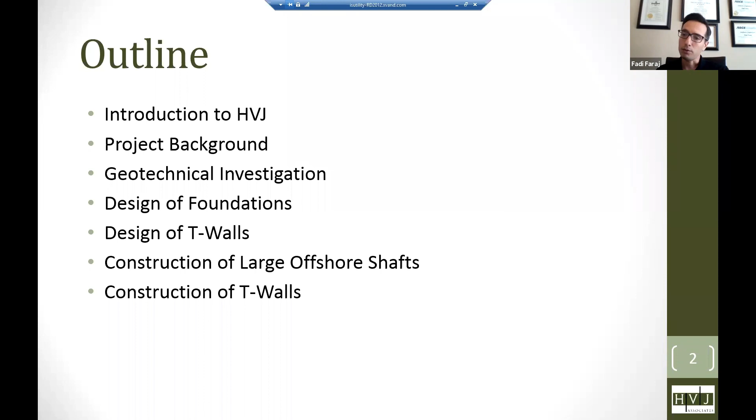Here's the outline of the presentation. We'll start with an introduction to HVJ, then the project background, the geotechnical investigation we did, the design of foundations, design of T-walls, and then the construction of large offshore shafts we used on the project, and also the construction of the T-walls.

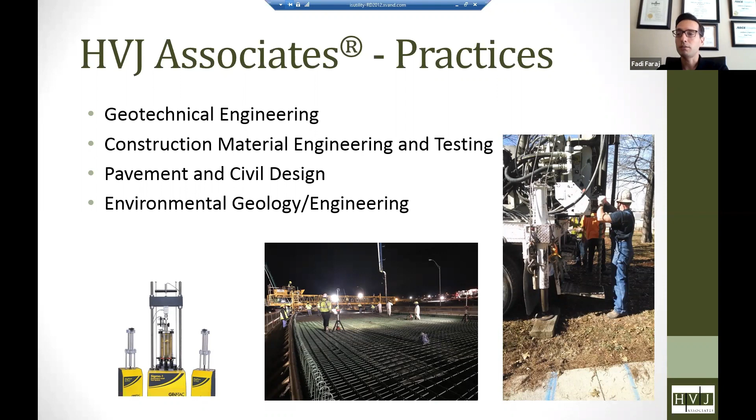At HVJ, we practice geotechnical engineering, construction materials engineering and testing, pavement and civil design, and environmental geology and engineering. Here are some of the markets that HVJ works in: roads, water, wastewater, flood control projects, airports and ports, rail and transit, buildings, and parks.

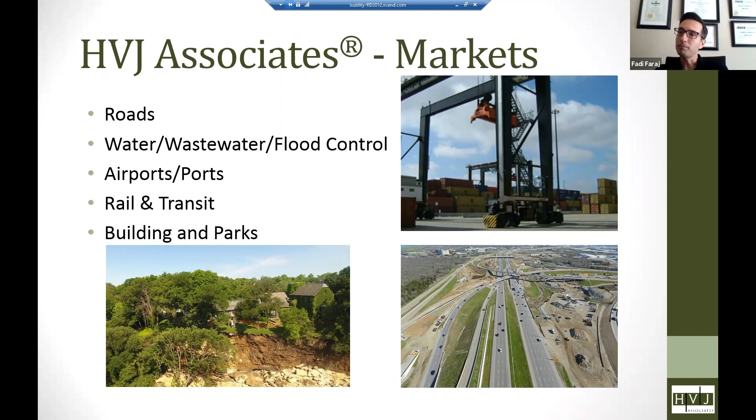A little bit of history about HVJ: it was established in 1985 by Herb Johnson. Then in 2016, it became the first engineering franchise in the United States. We have a Dallas franchise and an Austin franchise, and offices across Texas. Overall, we have more than 150 employees system-wide, and we're always looking to recruit new talent.

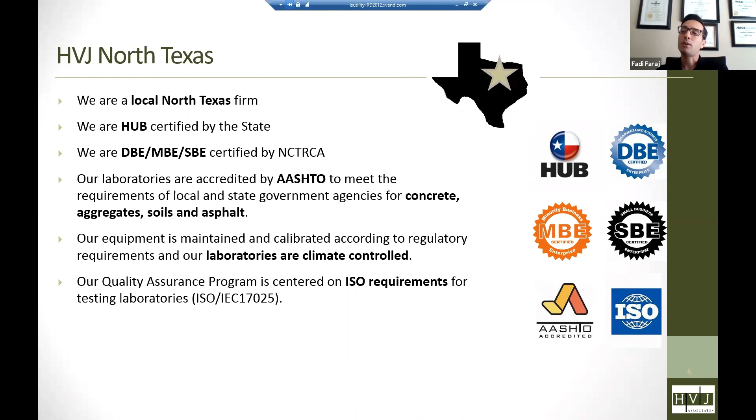I'm with the HVJ North Texas franchise, so we're a local North Texas firm. We're HUB certified by the state, and also DBE, MBE, SBE certified by NCTRCA. Our labs are accredited by AASHTO for concrete, aggregates, soils, and asphalt, and our equipment is maintained in laboratories that are climate controlled. We also follow ISO requirements.

These are some of our clients. We do transportation projects for NTTA and TxDOT. We do mass transit and rail projects for DART and Trinity Metro, which today's topic, the TRE, is operated by DART and Trinity Metro. Also, we do aviation like Dallas Fort Worth and Dallas Love Field. We do water projects like NTMWD, the Upper Trinity Regional Water District, and TRWD. Also educational institutions like UNT, and independent school districts like Dallas ISD. We do city projects for the City of Dallas, Plano, Allen, Frisco, and Richardson, and county projects like Dallas County, Tarrant County, and Hunt County. So most of our work is in the public sector.

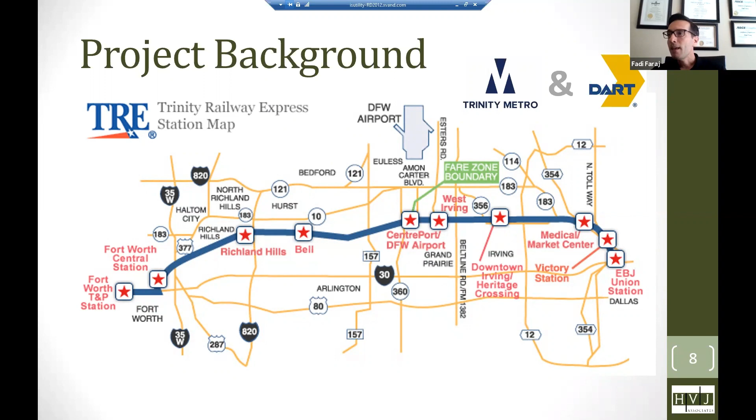So let's talk about the TRE, the Trinity Railway Express project. This commuter rail started on December 30th of 1996 — it's been about 25 years. It goes from downtown, from Union Station, connecting Dallas to Fort Worth, going through Irving and Richland Hills. A fun fact about this commuter rail is that on the first day it started, more than 4,000 people rode this train. It's operated by Trinity Metro and DART.

Our project is on the Fort Worth side. It's shown in this area, close to I-35W.

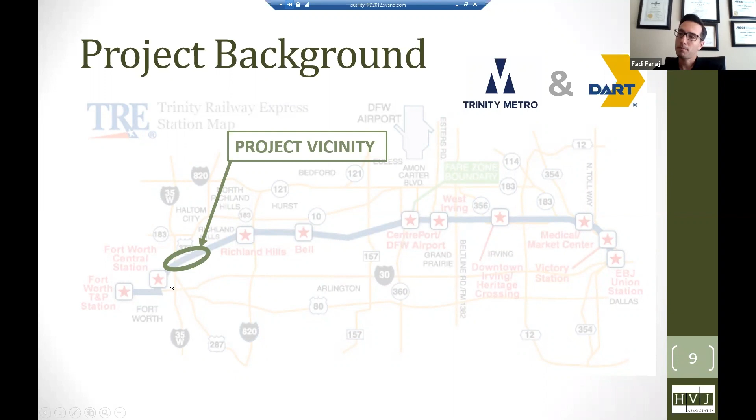So the Trinity Railway Express, when it crosses the Trinity River, this is where the project is. The limits are from I-35W on the west side to Sylvania Avenue on the east side.

It's a single track section, and it crosses the Trinity River over a 764-foot long bridge. This is not only used by the Trinity Railway Express, it's also used by Amtrak, Union Pacific, and BNSF. So it's heavy rail.

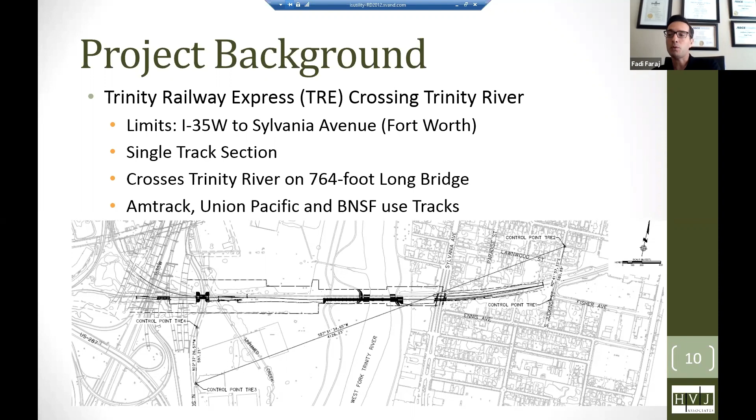So the existing bridge condition - this was constructed in 1903. It's more than 100 years old. It requires frequent inspections and maintenance. The freight trains have to reduce their speed to 10 miles per hour when crossing this bridge, and this causes a lot of delays. They have to wait on the bridge before they proceed to the next junction.

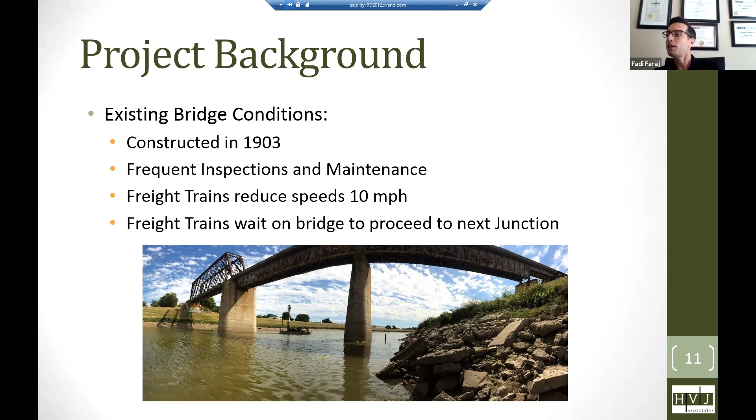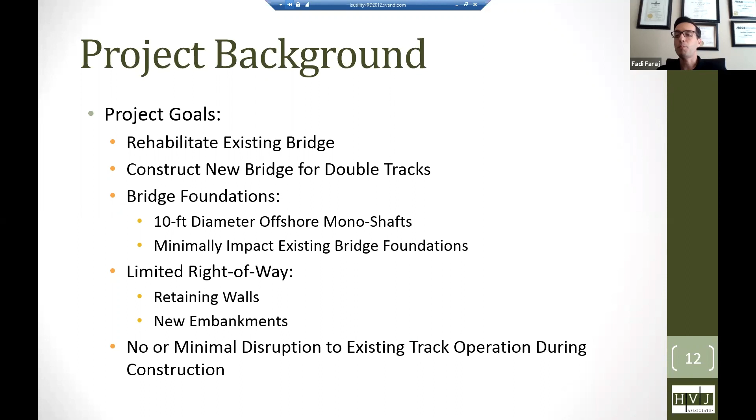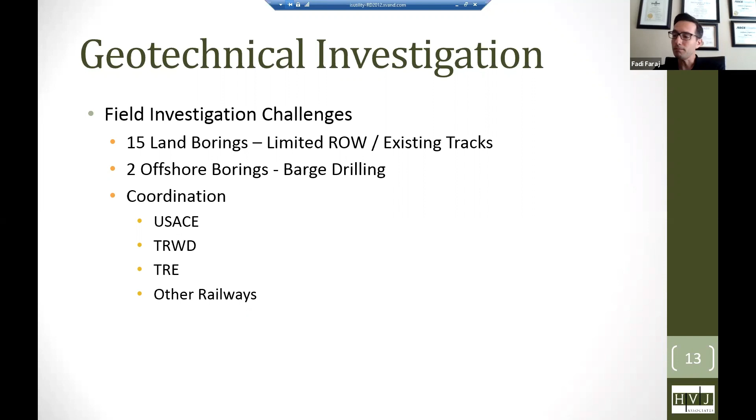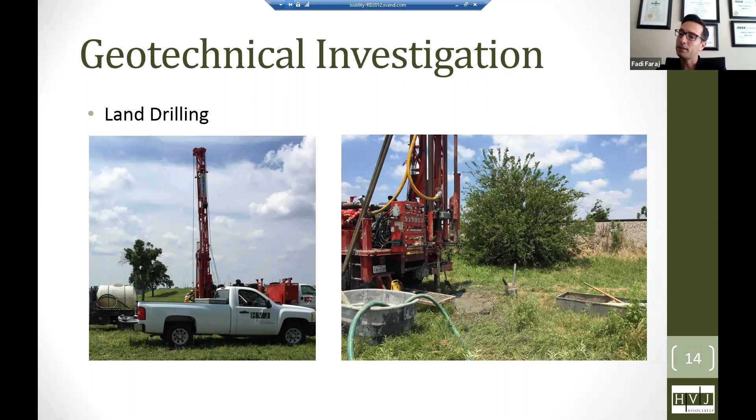Here are some pictures of the land borings we did. So we tried to stay away from the tracks, 25 feet away. There's a criteria - if you're within 25 feet, it requires flagging, and if a train is coming by, you have to stop the operation, and you may need to move the rig away and come back. So that was a little bit challenging.

And we used the barge to drill the offshore borings. So this is the existing bridge, and these are the existing columns. We wanted to put the new bridge right next to it, so we needed to drill 2 borings close to these columns. We actually had to bring a crane to drop the barge in the river because there was no nearby access.

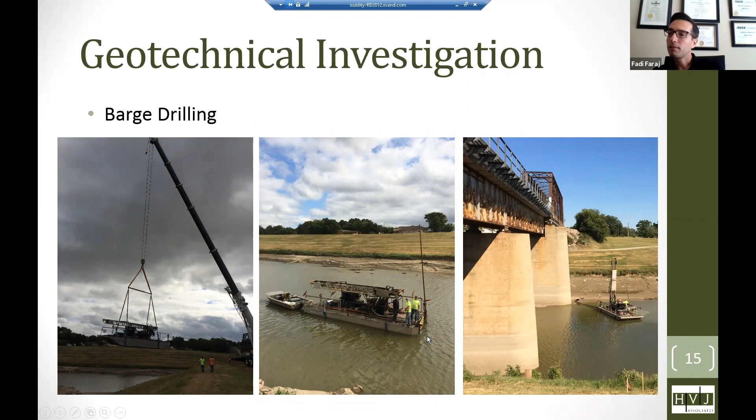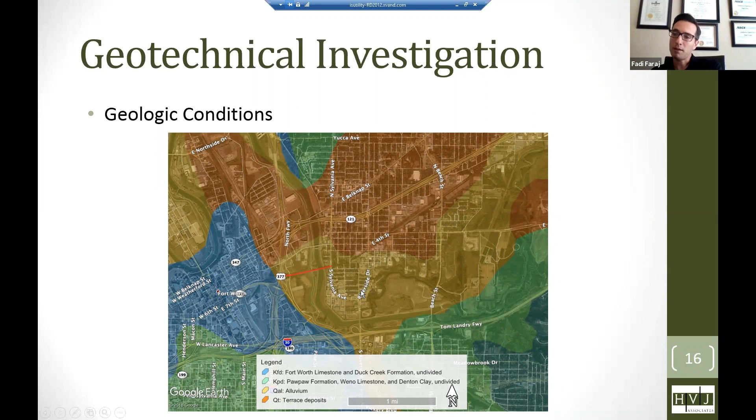And the layers in the DFW area dip from the west to the east direction. So for example, the Pawpaw formation would be on top of the Fort Worth limestone. However, because of the river, we have the alluvium deposits and the terrace deposits.

So the Fort Worth limestone and Duck Creek formation consists mostly of limestone and it has clays in it. The Pawpaw formation, Weno limestone and Denton clay, undivided also, consists of alternating layers of limestone, shale, and clay. Then the alluvium deposits and terrace deposits predominantly consist of a variety of clays, silts, sands, and gravels, and they're typically unconsolidated to semi-consolidated deposits found near rivers.

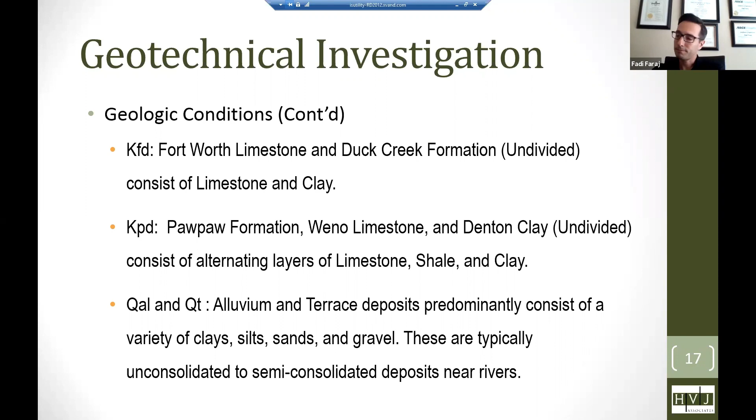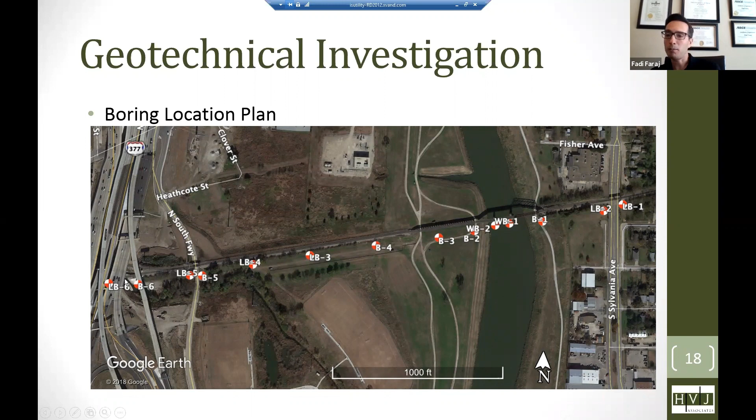So we collected these borings, and these are the tests we've conducted. We did moisture content tests. It's not that costly a test, and it gives you an indication about the soil conditions, if they're wet or dry. If they're wet, for example, they could be soft and consolidate more. If they're dry, they'll be dense and stronger, but they could swell more. So it's a good indication about the soil conditions.

Also we did Atterberg limits. We use this test for classifying the soils, if they're highly expansive clays or lean clays or not. We also did the number 200 sieve, which tells us about the material, if it's sandy or clay or silt. We did sieve analysis also to get an idea about the distribution of the granular material.

So these four tests were mostly for classification. We also did unconfined compression tests, compressive strength on rock, and unit dry weight. These tell us about the strength of the material. We did also direct shear. This test tells us about the long-term strength, which we would need for the global stability of retaining walls. We also did free swell tests and consolidation tests. Those would tell us the potential movement upwards or downwards of the soils.

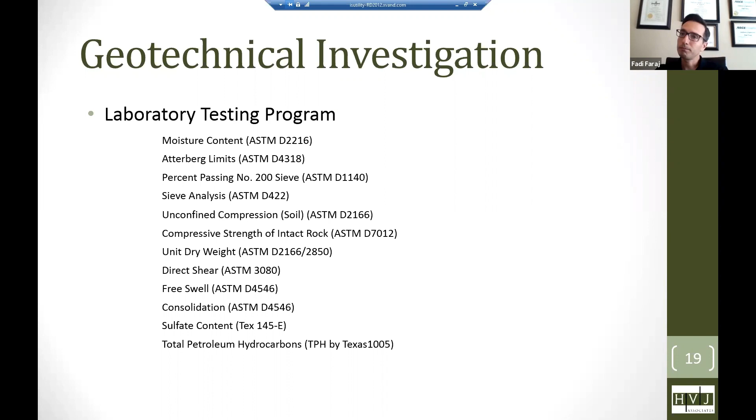This is an example boring log. I picked B5, it's in the middle of the alignment pretty much, just to give you an idea about typically what we've encountered. There was some fill material. There was sandy lean clay at the top, about 6 feet. Then we had fat clays below it with liquid limits above 50. The strength was okay, pretty stiff in this area.

Then we hit the groundwater around 8 feet and it became soft. Then it was followed by lean clay, then sandy lean clay, then clayey sand, and then we had gravels. This is very typical of alluvium and terrace deposits, alternating layers of all kinds of material. And then it was followed by weathered shale, which was followed by limestone, which was followed also by shale. So the geology map shows pretty much what we encountered in our borings.

These are TCPs, the Texas Cone Penetration test. So here we had like 5, this is 11, this is 16. As we started going deeper, the strength went up a little bit, but then it became soft again until we started hitting the shale. The weathered shale, we had high blow counts. And then in the limestone we had really good blow counts, like 100 blow counts for almost half an inch deflection. Also look at the compressive strength.

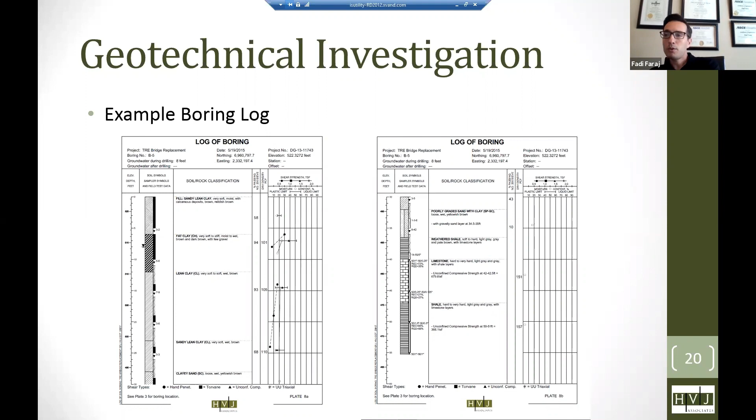But of course this is the river, so there's a lot of variability. So we plotted the profile showing the ground surface - this is the top of the ground, this is where the river is. And also we plotted the depth of rock throughout the alignment. As you'd expect, with the river meandering, this area is all overburden soils. Then looks like the river reached the limestone on this side and it kind of stopped. It may take several million years for the river to deteriorate this limestone and move this way, but we won't be around.

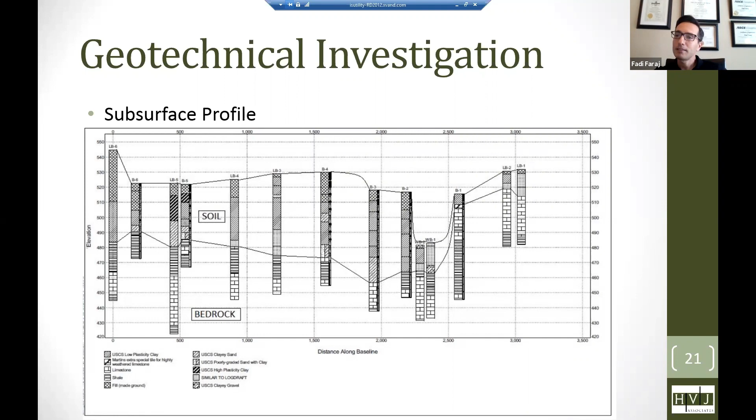So talking about the design of foundations. This project had 4 bridges, as I mentioned earlier - Sylvania Avenue, then the Trinity River crossing, then this bridge here, and this bridge at I-35W. And we used drilled shafts on the project. They ranged anywhere between 24 inches for the smaller bridges, and then 120 inches for the river - the columns in the river. That's like a 10-foot diameter, which is huge.

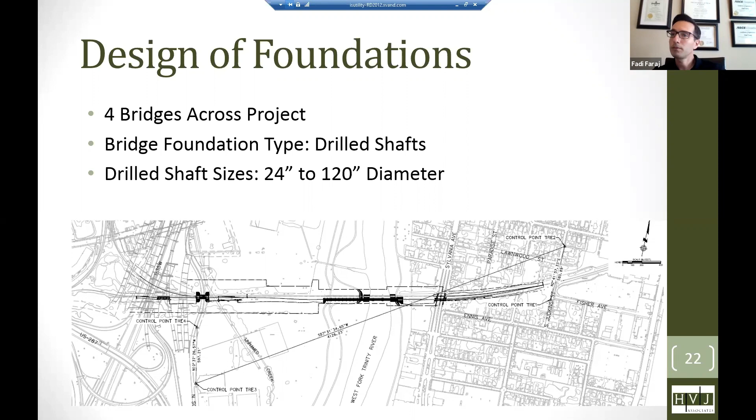So when we design foundations, if we have weak overburdened soils sitting on top of hard rock, we cannot rely on capacity from the overburdened soils because they require large movement to develop the skin friction, which the hard rock will not allow. I'm going to show you on the next slide.

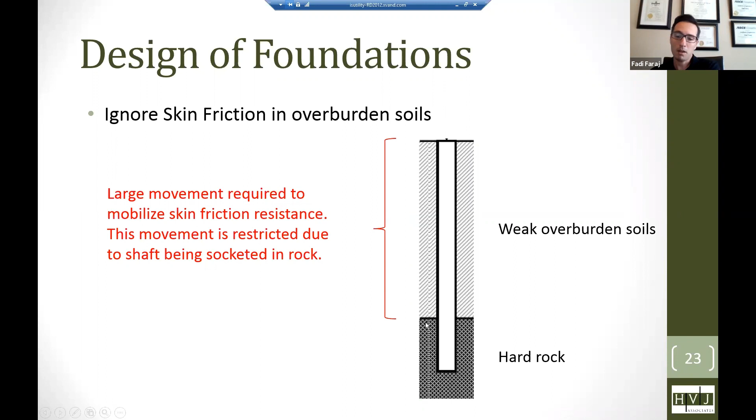So these are two tests we ran on the project. This is a soil compressive strength test. If you look at the strain versus stress, the strain went up roughly, and the failure happened around here.

Which is around 7% strain, so that's what it takes to develop the strength of the soil. While in the rock, it took only almost 1% strain to develop this high strength. And look at the scale of the strength: here you're getting like 2 TSF, here you're getting 10 TSF. So the rock is going to be much stronger and it's going to prevent the movement.

It won't fail if there's no movement. So it will prevent the movement, so the soil will not develop the skin friction. That's why we ignore it.

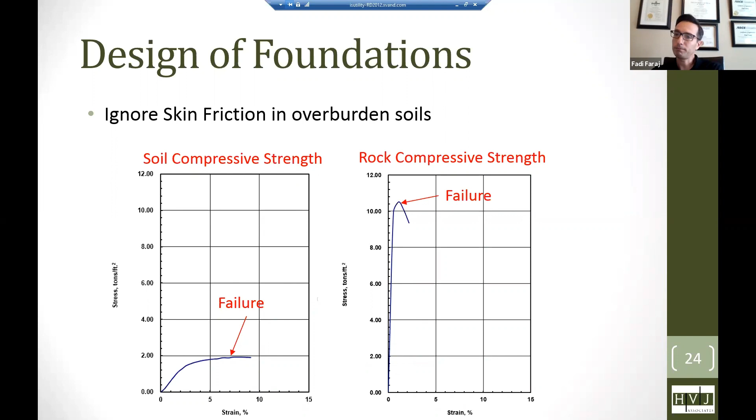So to design the capacity of the drill shafts, we used two methods. One of them using the Texas Geotechnical Manual. This is based on the TCPs, the Texas Cone Penetration Test, which we ran every 5 feet. And we looked only at the rock.

So this is for a penetration of this many inches per 100 blows, and you see where it lands on the graph and you find the allowable skin friction. This includes a factor of safety of 2.

So we were mostly around the 2 to 4 inches deflection, depending whether we're in the limestone or the shale. And this is for the end bearing, same thing. It's based on blows, based on the number of inches per 100 blows, and you read what end bearing.

This includes also 2 as a factor of safety for end bearing. It's a simple method—basically you're relying on the Texas Cone Penetration, which is a field test.

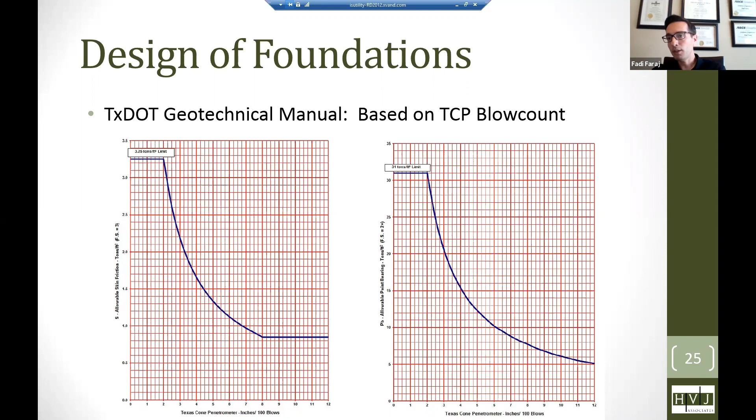These are correlations that TxDOT developed over the years. And it's fast—you get results pretty quick because you get the field boring logs and you have the readings already.

We also use the FHWA Drilled Shaft Manual. This method is more rigorous. It looks at other parameters—it looks at the rock type, for example.

So, for example, limestone is considered one of the rock types, and shale is considered a different rock type. There are other types of rocks, but this is what we encountered on this project and mostly what we have in Texas. It also takes into consideration the quality of the rock mass.

If you have the joint spacing more than 10 feet, it's considered excellent. If it's between 3 to 10 feet, the joint spacing is considered very good. And then if it's slightly weathered,

it's good. Then if it's moderately weathered, 1 to 3 feet is considered fair. Then you could have 1 inch to 1 foot, that's poor. And then you can have joints every 2 inches, which would be very poor.

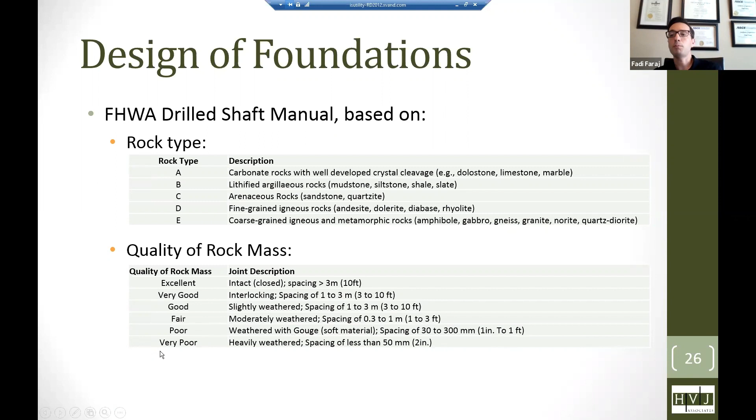Also, it considers the rock quality designation, RQD. RQD is actually the ratio of the core pieces that we get that are more than 4 inches in length, 10 centimeters, divided by the total length of the core run that we do. So typically we do a 5-foot core run, which would be 60 inches, and then we take this ratio as a percentage.

And if you get RQD less than 25%, it's very poor. 25 to 50%, it's poor. Then 51 to 75%, it's fair. 76 to 90% is good, and 91 to 100%, it's excellent.

Also, the FHWA method takes into consideration the strength of the concrete, the compressive strength. So that's something we have to consider—what's going to be the specified strength? Typically it's 4,000 PSI. That's what TxDOT uses, and I believe that's what we used on this project.

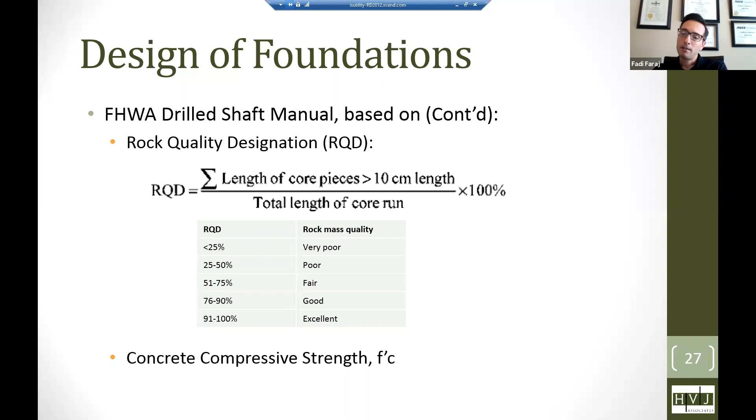So that's how we came up with 10 TSF to 16 TSF as end bearing and 2 TSF to 3 TSF as skin friction.

Then another challenge we had was whether we need to use permanent casing versus temporary casing. So we are in the alluvium deposits—we have sands, sandy soils, gravels, the river, high groundwater. So definitely there's a concern of caving in, so we have to use some casing to keep the hole open.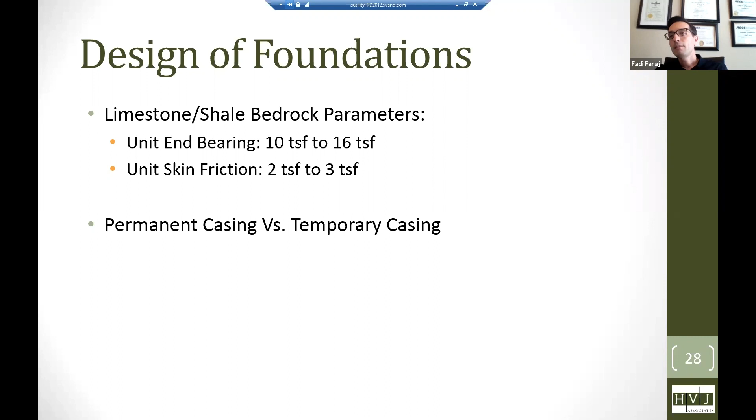Also, the railroads have requirements for permanent casings and temporary casings, depending on the location of the shaft, and also the location within the shaft. So, for example, this is the track. It will be here, about 12 feet from the center line of the track.

In this case, they're talking about sheet piles, which we didn't have on this project. Also H piles, we did not have on this project.

Then, if you have drill shafts within 25 feet from the track, and if you're within this zone they call Zone A, then this requires casing. It's determined at a slope of 1.5 horizontal to 1 vertical at this distance, which is 7 feet and 9 inches, and then from the edge of the ties at a 1-to-1 slope. Basically, this is the area where we expect the highest stresses, the impacts from the train, and you want to have casing in this zone.

It's required. Then if you're more than 25 feet away, depending on the shaft diameter: if the shaft diameter is less than 30 inches, Note A says you do track monitoring if open hole construction is used. If the diameter is more than 30 inches, then you use temporary casing or the slurry displacement method with internal pressure to maintain the concrete inside.

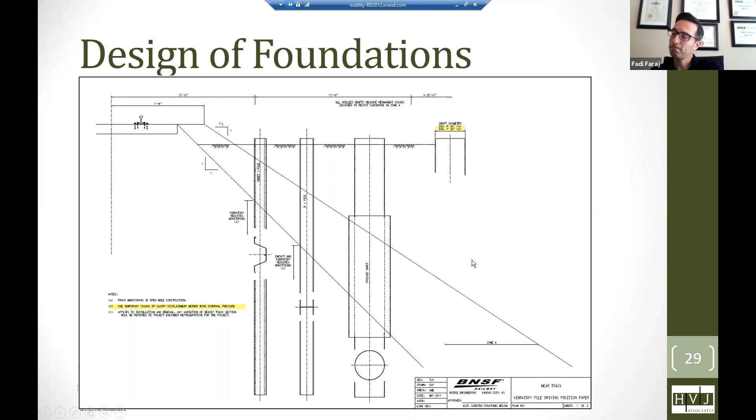So the biggest challenge we had was the offshore drill shafts. Those were really huge, 10-foot diameter mono shafts. We're really relying on only one single shaft at each column. If it fails, it's a disaster—there's no redundancy. And the shafts were installed through the alluvium below the mud line. There's water, so definitely casing was required, and we had permanent casing requirements for those huge shafts.

Concrete curing also near the live tracks was considered. And we required thermal integrity profiling because we wanted to make sure the integrity of the shafts is very important, because if we have any caving in or any impacts, rebar exposure, we could lose the shaft.

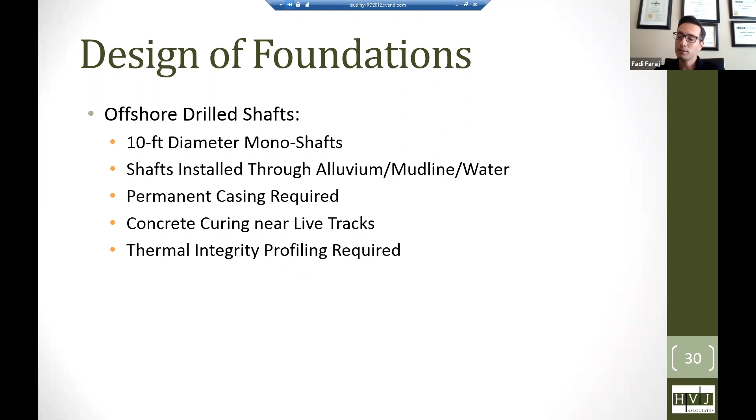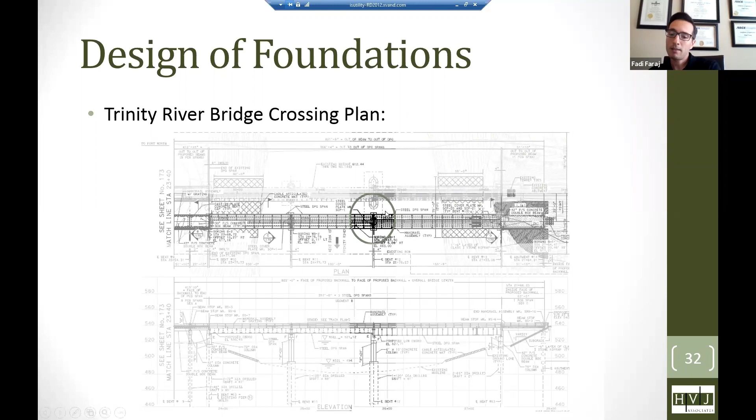So this is the new shaft location. One concern we had was how close we are to the existing foundation. We didn't know what's there because there were no as-builts—again, this was built in 1903, and there was no proper documentation for it. It was based on a spread footing, actually, that was sitting kind of shallow.

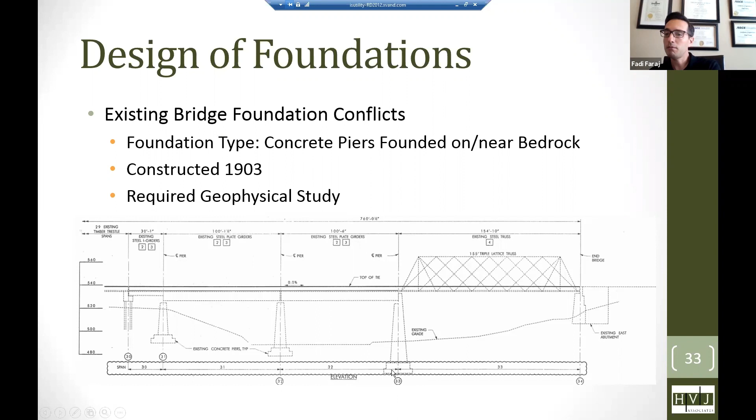So we had to do a geophysical study to find the extent of the foundation. We used electrical resistivity tomography—a dipole-dipole/inverse Schlumberger geoelectrical array. We used six traversing lines perpendicular to the southern edge of the footing. Our objective was really to find what's below the ground, what's the extent of it. We don't want to hit it with a new foundation.

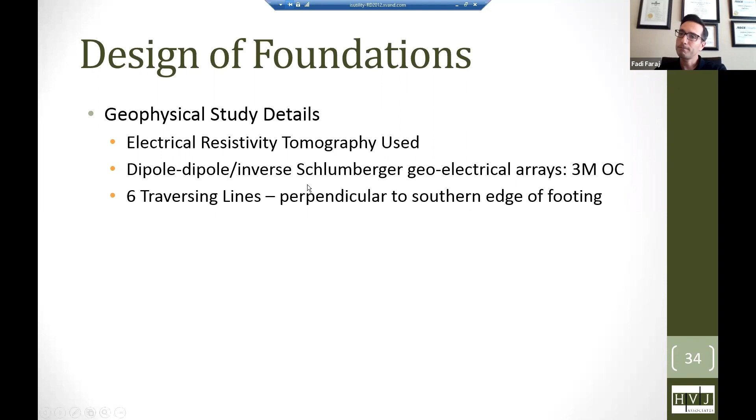So these are the findings of the geophysical study. Basically, this is the depth, this is where the column is, and we were able to determine the extent of the footing below it. So this is what you see above ground, and this is a base sitting there. But below it was this—this is the extent of it. Again, this is what's below the ground, forming this shape.

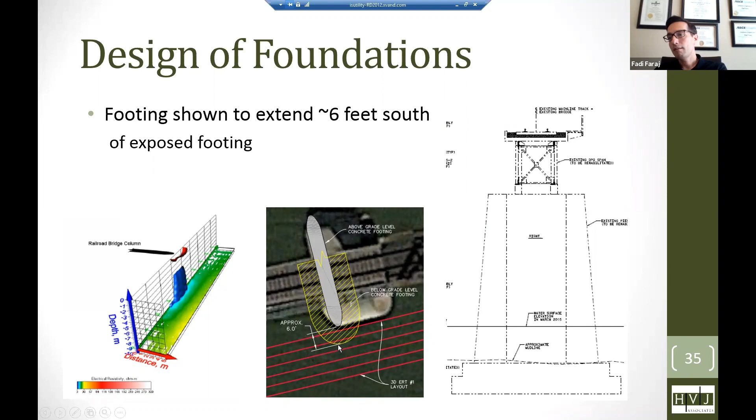And because of our limited right-of-way, we really had to be close. We were only 4 feet away from that footing shown in the geophysical study. We had to work closely with the structural engineer, and every foot mattered. We had to negotiate how we could maintain this 4 feet.

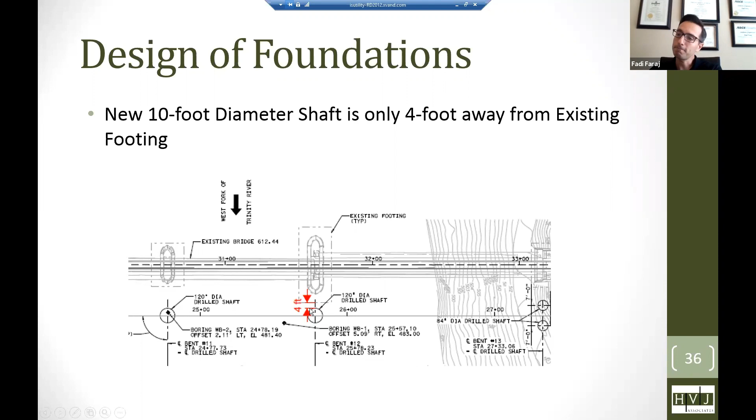And also, since this is in the river, turbidity fence and oil booms were required to avoid pollutant discharge into the river.

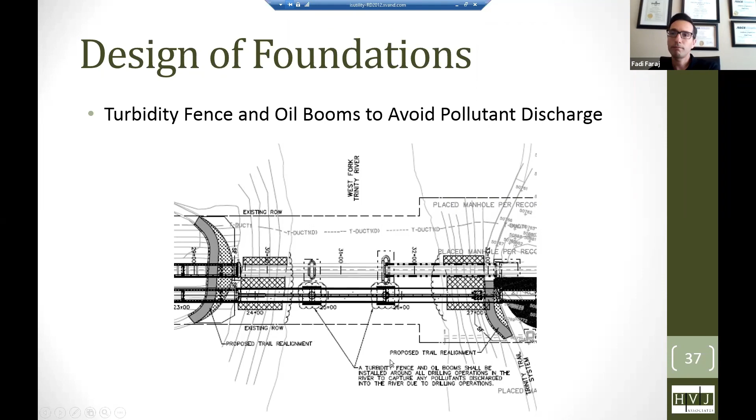Now let's talk about the design of the T-walls. Those are T-shaped precast walls. They're very popular for railroads because their construction is very fast. You just stack them on top of each other, and use a free draining backfill in between. Quick installation, when you have railroads on a tight schedule, they're very popular for that purpose.

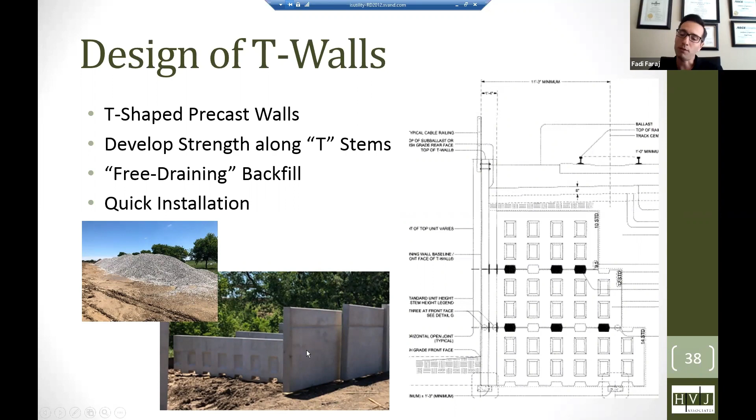We had 2 retaining walls on the project, and the maximum height was 13 feet. Because we had limited right-of-way, we also had limited construction space since we have an active track as well. This is the active track. The total length of the retaining walls was 1,000 feet combined.

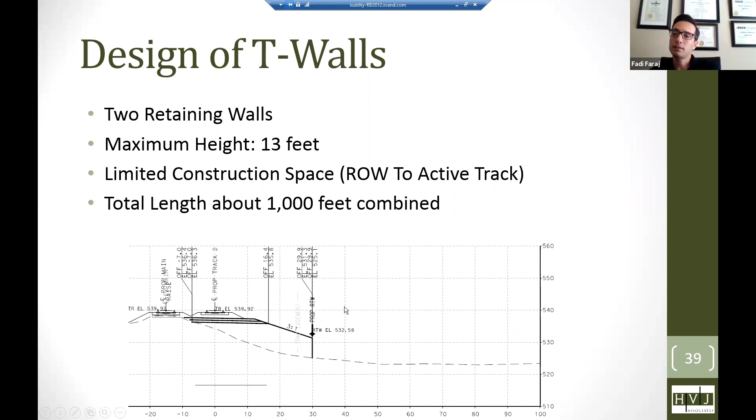When we design retaining walls, we look at different potential failures. The first one is sliding, which is when you have high lateral pressures that push the wall outside in a horizontal direction. It just slides.

Another stability issue we look at is overturning. You could have high lateral pressures that make the wall rotate about a point here, the point of fixity.

Another item we look at is bearing capacity. You could have failure where the wall sinks down because the soil is too soft and can't carry the weight. Don't confuse this with overturning. With overturning, the wall does not go downwards, it just rotates. With bearing capacity failure, it goes down and it tilts.

Then we look at deep-seated stability, which is the global stability. Basically, the whole thing could slide in this shape.

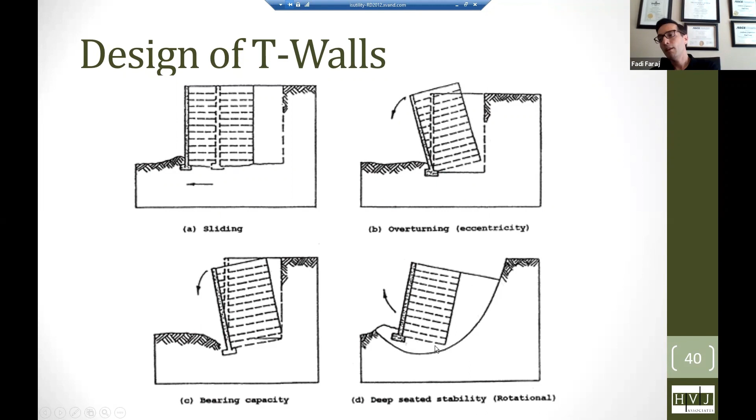These are the minimum recommended factors of safety. For sliding, we had 1.5. For overturning, it was 2.0. Bearing capacity also 2.0, and global stability 1.5. So we need to be above these factors of safety.

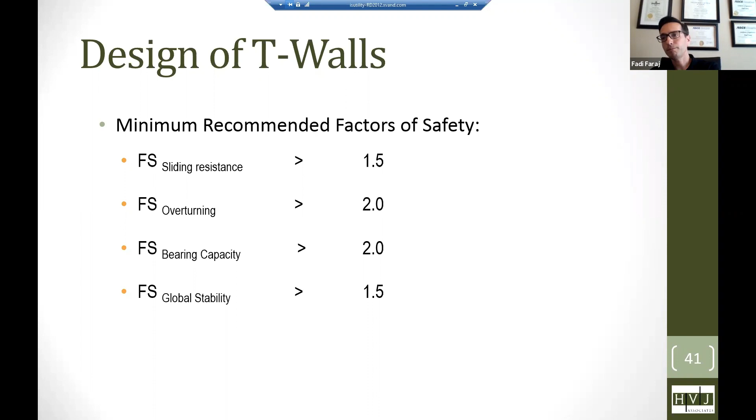The challenging thing about the T-wall design on this project was that we had 2 tracks, one here and one there. The load from the track, depending on its location, could actually help improve the stability of the wall, or could impact it and make it worse.

For example, this track here is applying a vertical pressure on top of the wall. This vertical force results in higher sliding resistance. Imagine you're trying to pull out something with a heavy weight on top of it, you won't be able to pull it out. So this track is really helping with the sliding resistance.

This track on this side is not helping. It's actually applying lateral pressures that push the wall, exerting forces that will make the wall slide.

For bearing capacity, for example, this track here is applying pressure on the wall directly. This other track also has some effect on the wall, so it's applying bearing pressure too. So both are not helping, you need to consider both of them.

For global stability, for example, usually the center is somewhere here, and we have a slip surface in this area. So both tracks are applying pressure. That's not helping, we need to consider both of them.

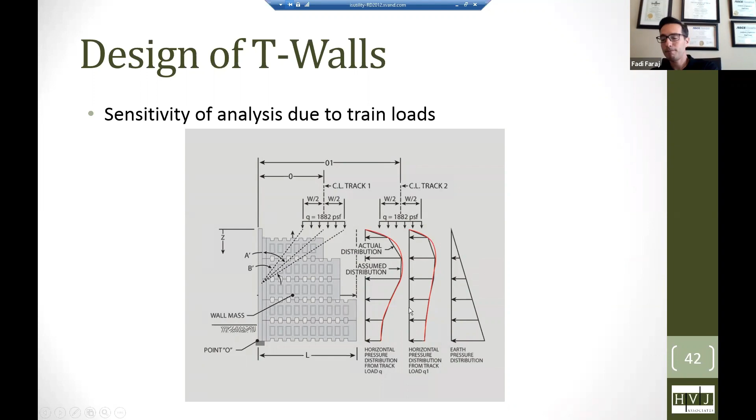To make things more complicated, this is the existing track here, and this is the new track next to it, and here's the wall. The distance from the face of the wall to the track actually varied throughout the alignment - for example, here we had more distance. That was another factor we had to consider, not only what train load to apply, but also where to apply it. So we had to do different cross sections throughout the wall. This was very labor intensive.

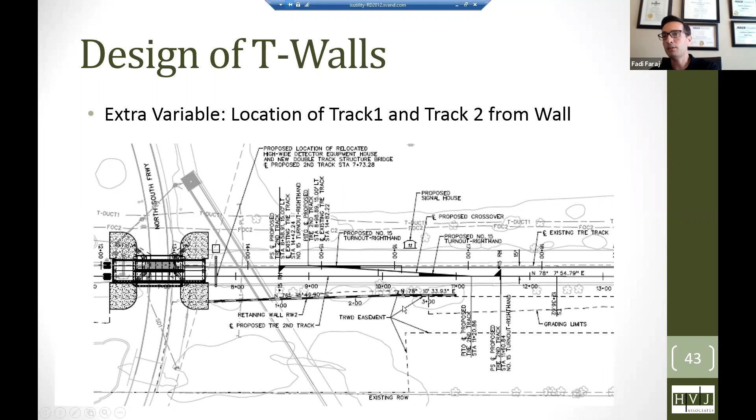This is an example of the analysis we did. We used Geo-Studio software. Geo-Studio is one of the most advanced software out there for global stability analysis because it allows you to use a method where

basically the analysis is done based on slices. You take different slices throughout the cross section and look at the horizontal forces, vertical forces, and moment at each slice. Then you apply the loads that you have and the weight of the soil. At the interface of each slice, the forces have to match.

So this software allows us to get the equilibrium to satisfy the horizontal forces, vertical forces, and moment. Not all software can do this. Most software available in the market only satisfies two of the equilibrium conditions, either horizontal forces and moment, or they don't satisfy all three. The answer is not that far off, but this is more accurate, basically.

So after we run the global stability, we generate multiple surfaces. You see these dots here - each dot is an initiation point for a surface. And on this side, you see other dots, these are exit points. So you get multiple surfaces going in between.

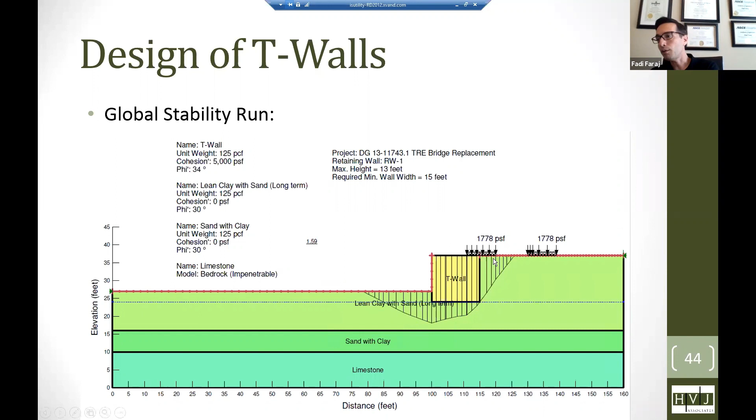Another thing we have to consider is eccentricity. We want to make sure that the resultant force is within the middle third of the wall. So we had to calculate the eccentricity, and if it's not within this area, we could extend the stem longer to ensure it's within the middle third.

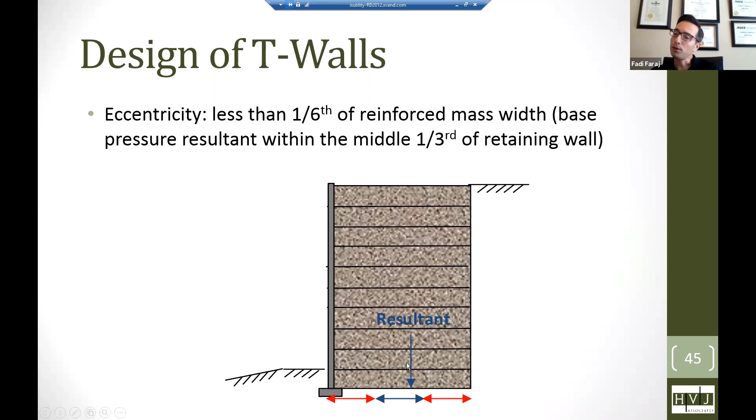Another item we had to consider is the minimum embedment. You see this mostly on retaining walls. There are multiple factors that impact embedment - it could be bearing capacity, where you want to achieve more bearing capacity by embedding the wall deeper. It could also be stability considerations, like sliding - if we're getting a sliding issue, we could embed the wall deeper so we have more passive resistance.

It could be settlement also, because the wall has better material in it, so you're improving the ground below it by embedding it deeper rather than sitting on softer soil at the top. Also frost penetration - typically frost penetration in this area is around 1.5 foot, 1 to 1.5 foot, so that's why you see mostly minimum recommendation as 2 feet embedment.

Also, there's shrink swell potential, and seismic activity, which we don't have much in this area. And also there's scour - if you could have some scour that could erode this area, you want to have more embedment.

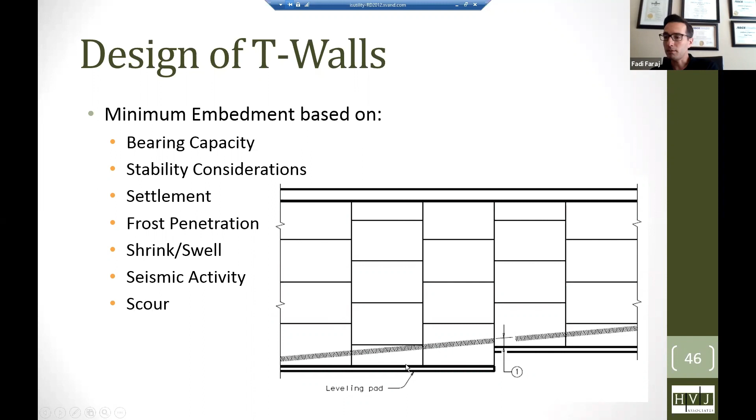Another consideration we had for the design of the T walls is settlement. We had two retaining walls, and we considered the immediate settlement - this is as you build the embankment or as you're building it, it happens. This is mostly where we have granular material, so the moisture escapes immediately and you get the immediate settlement - this is like an elastic settlement.

We also consider the long-term settlement - this is if you have clays and it takes a long time for the water to escape from the clays. We also had to consider this without the train load, assuming the train is a transient load, so it's not sustained, it goes by, so we don't consider it.

And then we had to consider it with the train load. With the train load, that means basically the train sits there for a very long time. How likely is that to happen? Probably not likely. Is it possible? Yes, it is possible - a train could break down and sit there for a while.

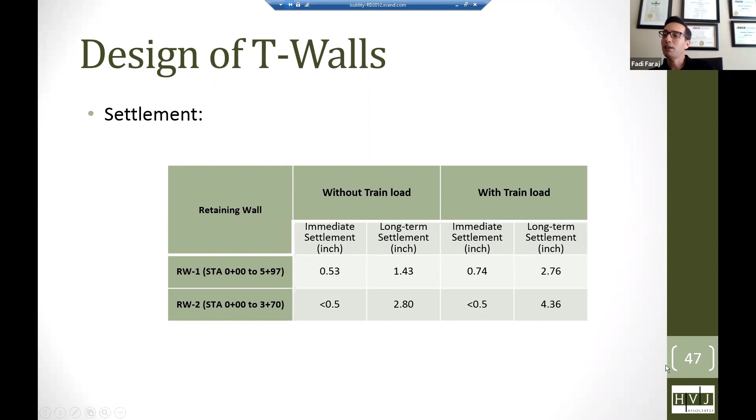So this is what we calculated. This is the immediate settlement for each wall without the train, and this is with the train. This is the long-term settlement, and we also looked at the time, how long it's going to take for the settlement to happen. For example, we had 2.8 inches on retaining wall 2 without the train, and 4.36 inches with the train.

So we used an advanced software on this one. We used Settle 3D. It's a very powerful software where it actually models settlement in 3 dimensions.

So this is, for example, the settlement model. This is without the train - 2.8 inches we got. So this is the embankment you apply on top, and it gives you the settlement. It's mostly in this area, the middle part of the embankment, and as you go deeper it diminishes. The effect really, for example, you were getting 0 inches as you go deeper.

So this is also the model with the train load on top. We got 4.36 inches.

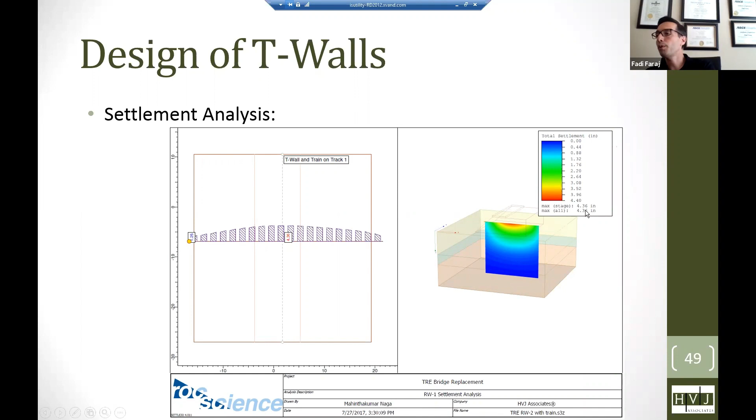So this is what went on the plans. Basically, one wall we had 15-foot long stems, and it had the train sitting right on top of it, pretty much. There's no slope here. Also, we used an under drain on this side of the wall at the bottom.

And then this is the other wall. We had a 17-foot long stem, and we had a slope on top, and the slope varied between like 2:1 to 3:1, but also dependent on the train location. Here the train was more on top of the wall, here the train was further away. So you had two trains applying lateral pressures, pushing the wall away. So sliding, for example, was more critical on this wall than this wall.

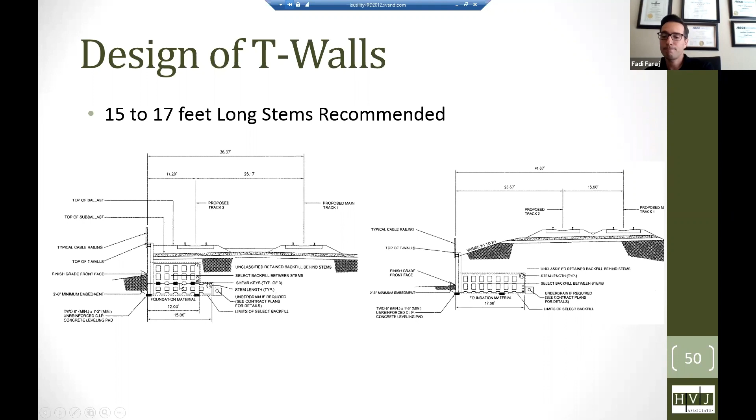So let's talk about construction of the shafts. I want to talk about the mono shafts that were offshore. Look at the rebar - this is for a 10-foot diameter shaft. It's huge.

Actually, the contractor had to build an access pad to this area so they can build the shafts.

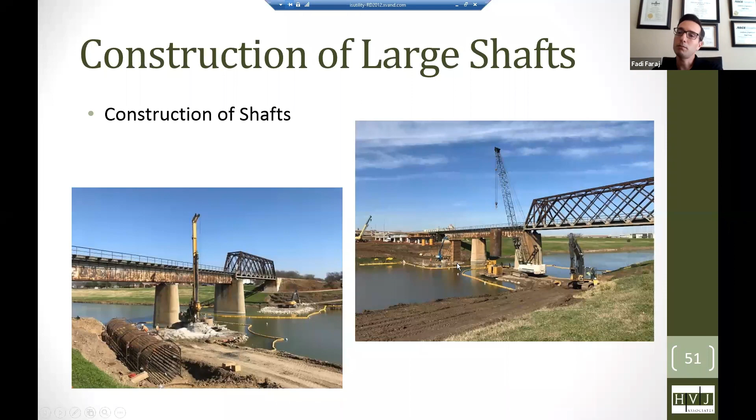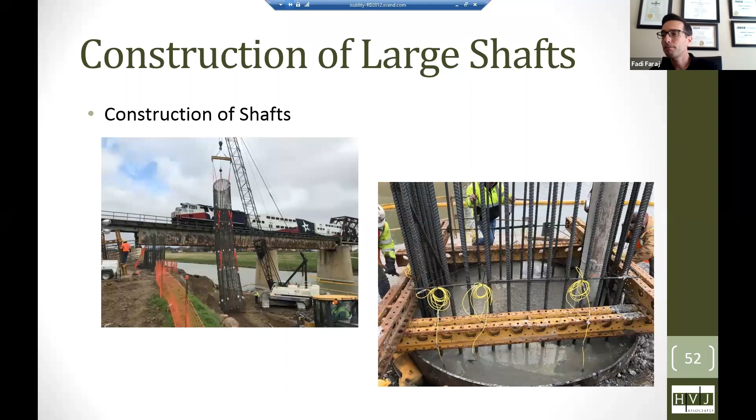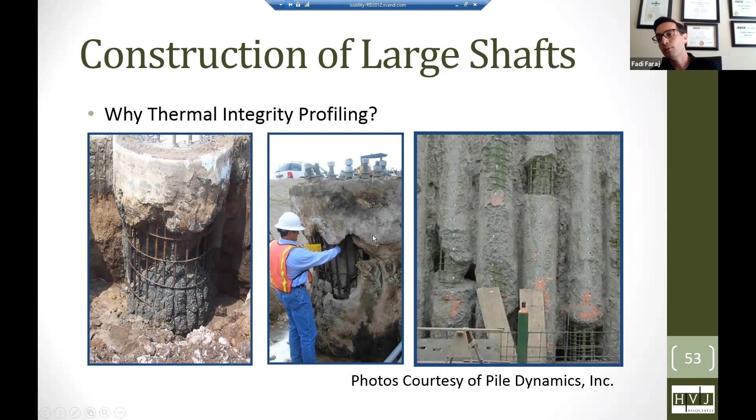So this is the concern - we didn't want to have shafts looking like this, for example, especially since it's a mono shaft. There's no redundancy, and a failure would be catastrophic. So this is why we have to test the integrity and make sure the shaft is intact.

So we recommended using thermal integrity profiling. The advantages of this method are that it uses temperature versus depth versus quadrant, because we have multiple sensors all around. Also, it tests early after casting, so it speeds construction, because the way it works, it's detecting the temperature in the concrete. And when the concrete is reacting, when you pour it, you get very high temperatures, so you're getting immediate results. It's telling you where the concrete is as soon as you're pouring it, pretty much. So you get the results usually between 12 to 72 hours, depending on the diameter and the mix design.

It evaluates the concrete quality also, and it tells you about the cover and the cage alignment. It avoids false positive issues, and it only reports significant defects.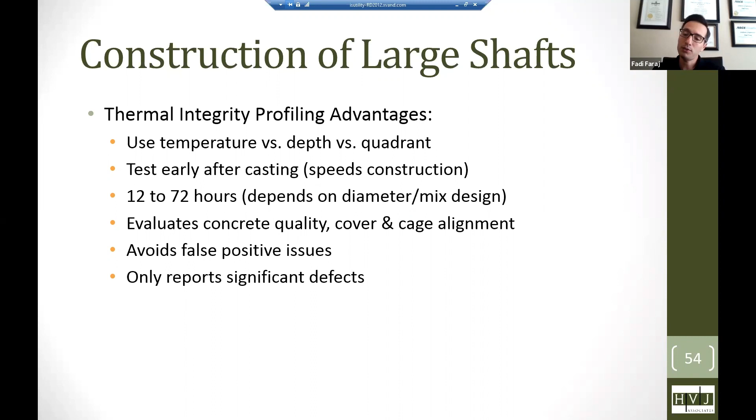So here's a little bit of theory, which, by the way, is done by Pile Dynamics Inc. They have a patent, I think, on this technology, and they've shared with me those slides, and I asked permission to use them. So basically, this is the theory of it: you have sensors that are installed all around the diameter of the shaft that go down all the way.

In this area at the top, there's convection heat loss to air, or exposure of the shaft. Also, there's some lateral temperature distribution, so if you're monitoring the temperature, you're going to get low temperatures on the top in the sensors here, and then as you start going deeper, you start getting higher temperatures.

So this is, for example, the cage diameter. This is the excavation diameter, and the sensors are around the cage - they're tied to the cage, actually. And this is how a temperature distribution would look like if you take a cross section inside the concrete. So it's pretty high here in this area, and at the edge of the concrete, it starts dropping down.

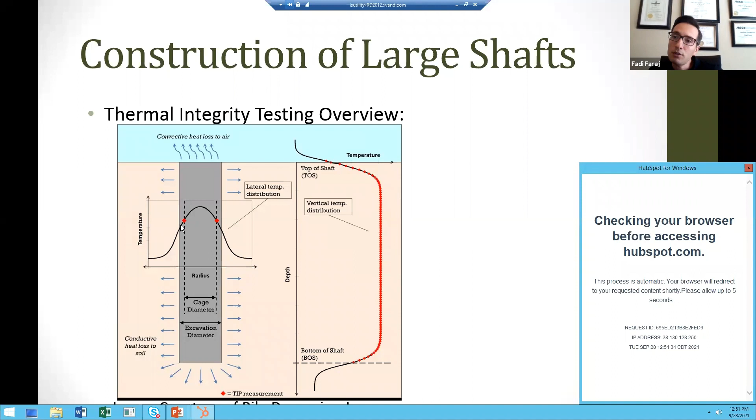And this is basically the soil around it - this is the soil temperature. So you have conductive heat loss to soil around the concrete. So this is the kind of shape you get for the temperature distribution. So at the bottom also, there is some loss, some heat loss at the bottom, so you get something like this.

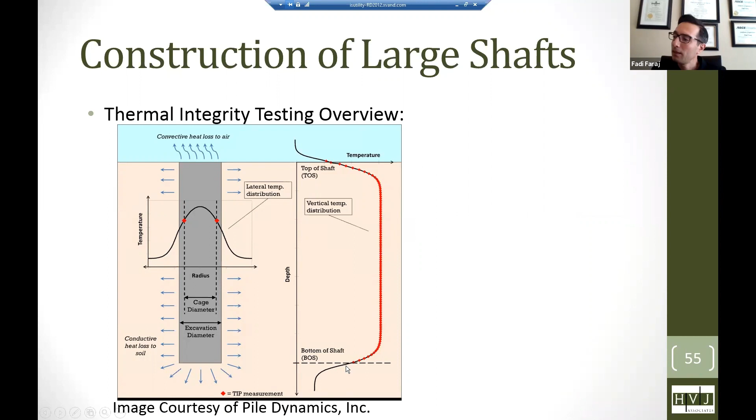As you can see, at the top there is heat loss because of exposure, and also some heat loss at the bottom. But for the most part, it's pretty consistent.

It also tells you about the concrete cover, which is what we're mostly interested in. This is a 10-foot diameter, so 60 inches in radius. You can see the cover in this area—there's a little overflow, so more cover in this area. And in here, it's pretty much 60 inches. So we're getting 60 inches or more throughout.

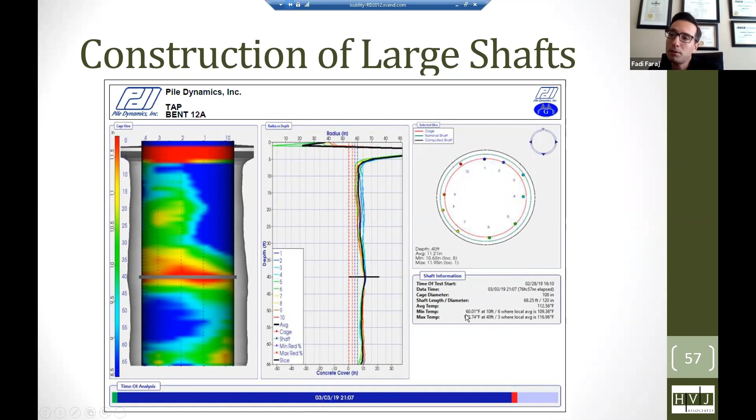Here you see the readings from the different sensors, which also give you the shape of the shaft. So basically we were getting more than the 10-foot diameter on these shafts. We designed those shafts with an extra, bigger diameter, giving us even more capacity that we're not even counting on. The minimum cover was 10.63 inches, and the maximum was 11.95 inches. So we were comfortable that the shafts were built properly.

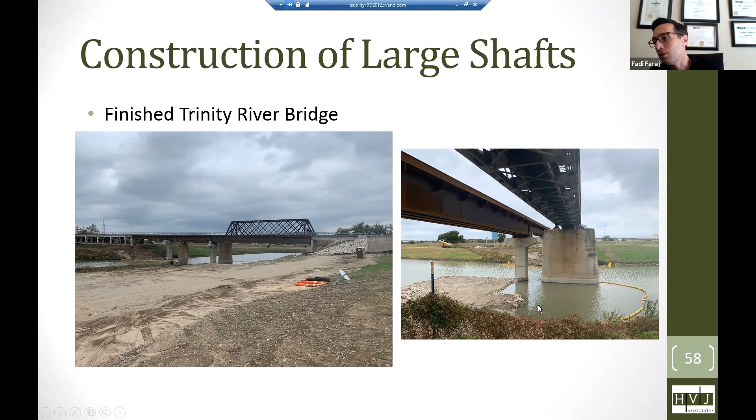Now let's talk about the T-walls. Some of the challenges we had was that there was a heavy rain event when they exposed the subgrade, and water was ponding basically. So these conditions were different than what we designed for.

I went out there and checked the site, and we had to come up with a quick solution so we don't delay the project. To make things complicated, we have an existing track right next to it, and we're building one right in this area, so we're only allowed to shut down this track for 12-hour windows. We were limited for maybe 12 or 20 days throughout the whole project. So we wanted to come up with a solution to build this fast with minimal impact on the existing track.

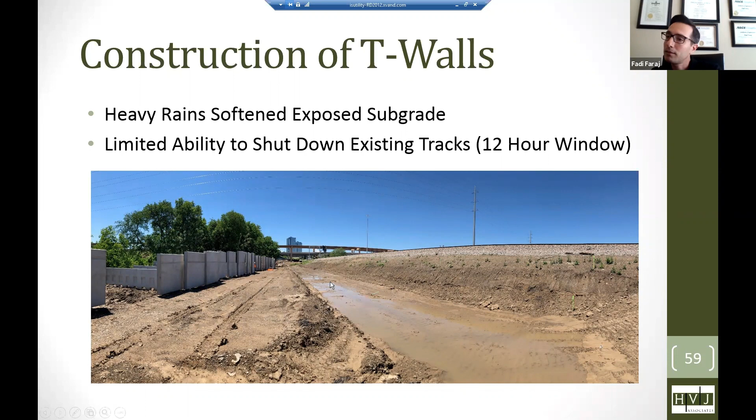So we recommended using flex base material and geogrids on top, so we can bridge over. We over-excavate the soft soil and use that material, then recommended building the wall halfway so we gain strength as it consolidates. After building it halfway, we build the second half and finish the wall with minimal interruption. So we're relying on increased shear strength while using the staged construction.

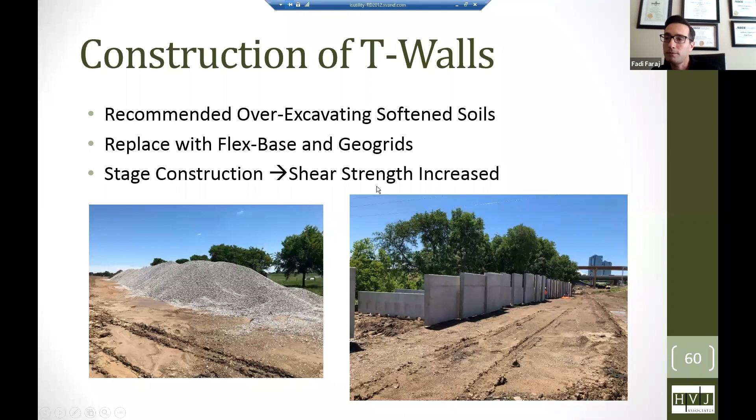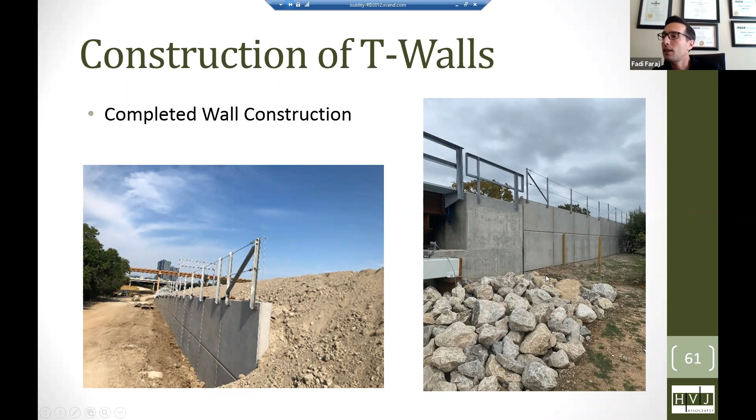This is a picture of the wall after it was built. This is the area where we had the soft soils, and this is the other wall that was also built.

So with that, I'll open it up for questions.